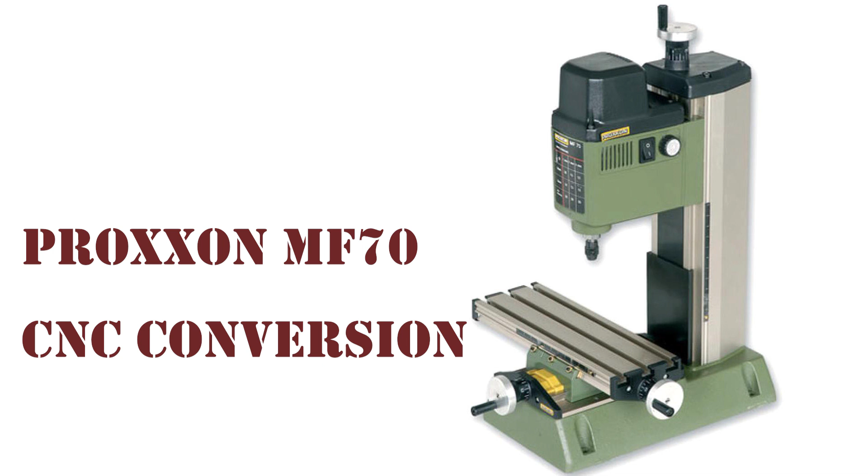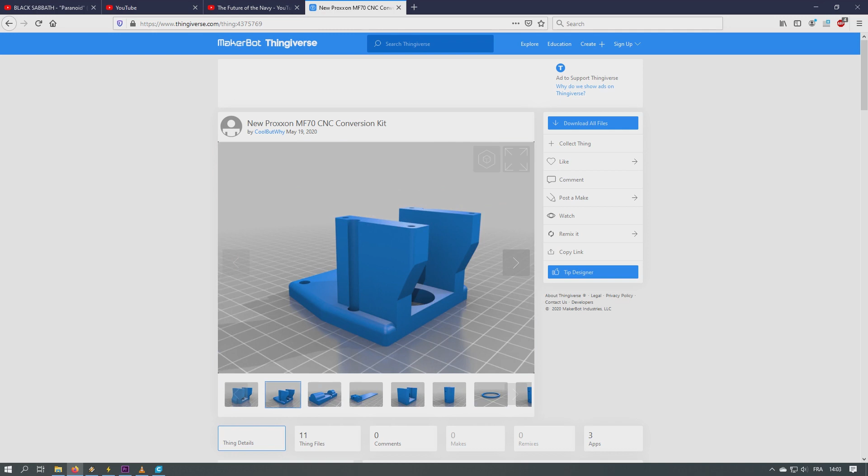Hello everyone, and welcome back to this last video of my Proxxon MF70 CNC conversion. I've managed to put together all the files and publish them on Thingiverse, so I thought I would make this quick video to wrap things up. I will go through the main concepts behind this build and also try to address some of the other aspects of my CNC experience.

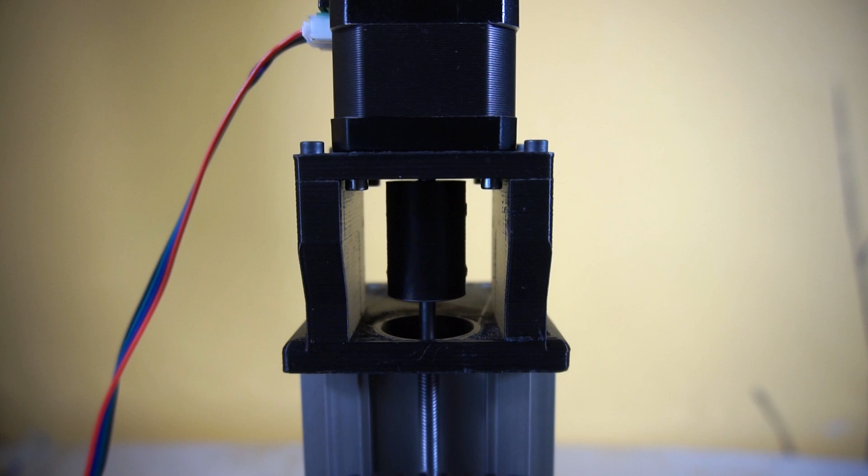The main idea of this conversion was to use the stepper motor as the fixed point of each axis and get rid of any intermediary bearings, flexible couplings, etc.

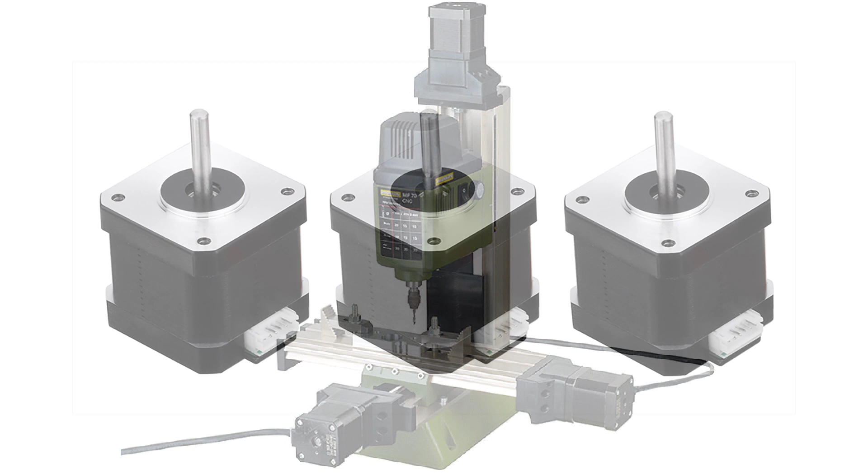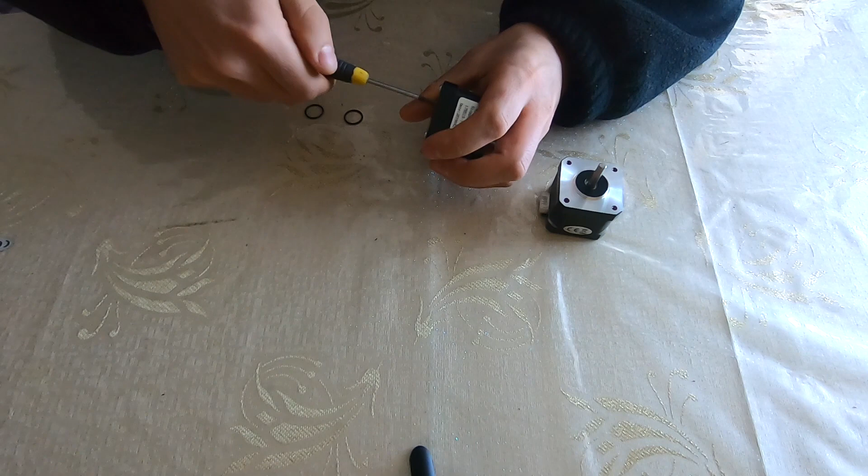Like many CNC conversions out there, this one uses the popular NEMA 17 stepper motor. So we'll start with the motor, which has been the recipient of the first modification, which, although small, is critical to this project. The idea is to take up the slack inside the motor so it can function as the fixed point of the axis without adding to the backlash of the system.

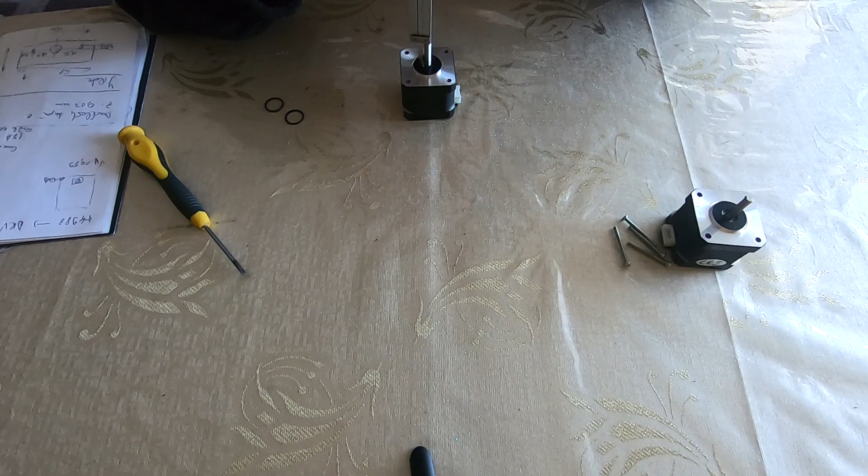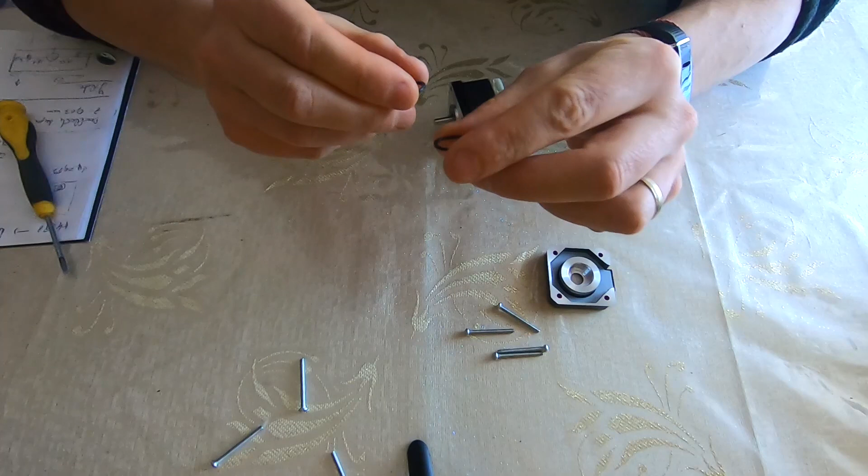You will first have to remove the wave washer inside the motor, measure the play, and print the adjustment ring to the correct height. For this you can use the scaling function in your slicer. In my case, the play was different for each of the three motors, so be careful. Do them one by one, ideally.

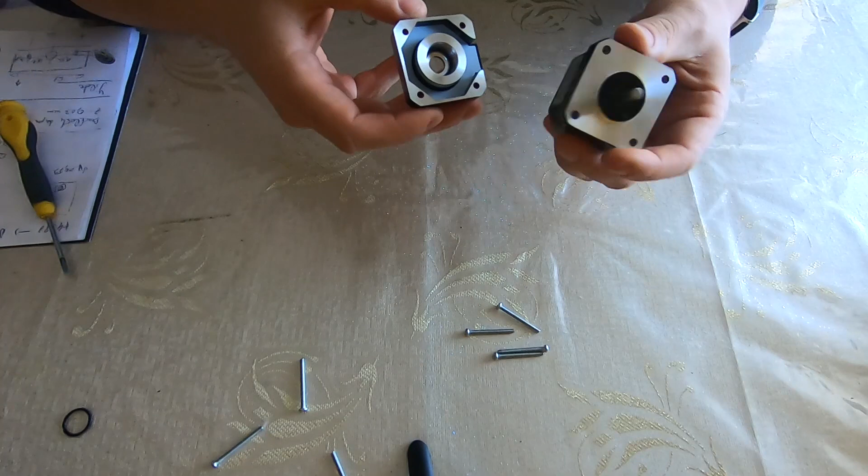The coupling between the motor and the lead screw is made rigidly using this 3D printed coupler.

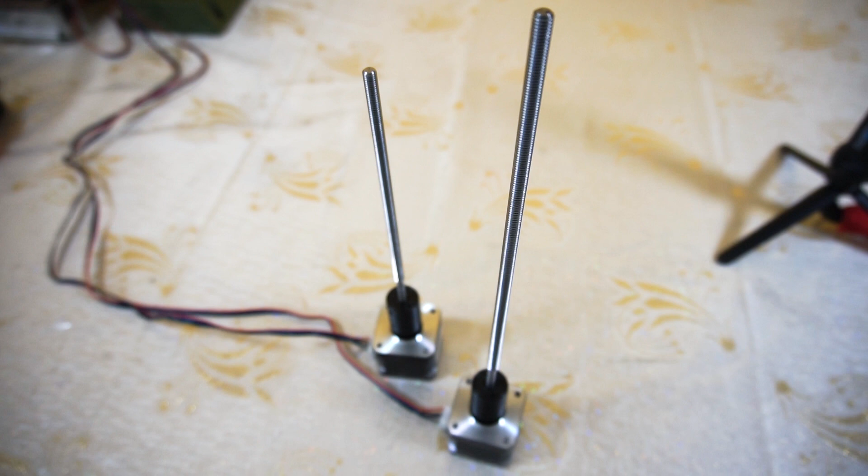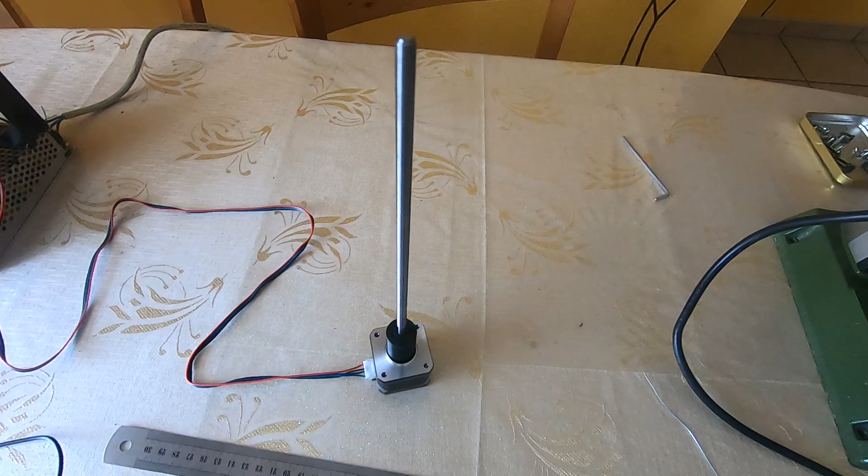The original lead screw is not particularly straight, so you will need to fix the wobble as best as you can. I think a small amount of movement can be tolerated by the system, so don't worry too much about this one.

The bridge part of each axis is just that, a link between the motor and the milling machine.

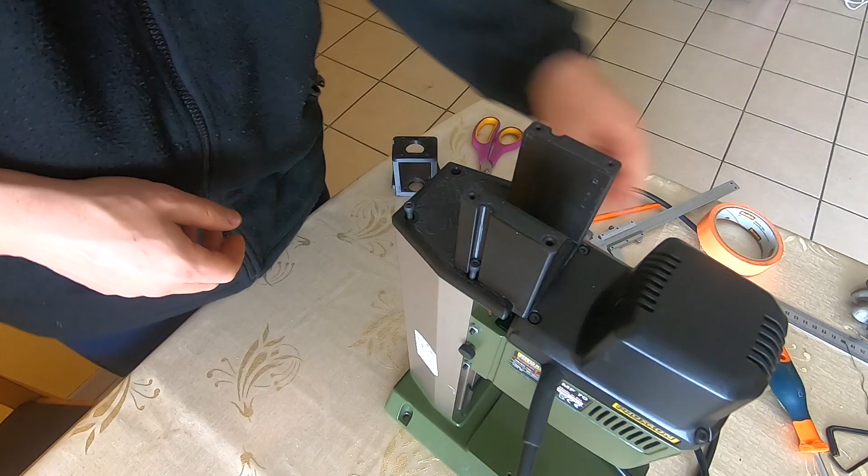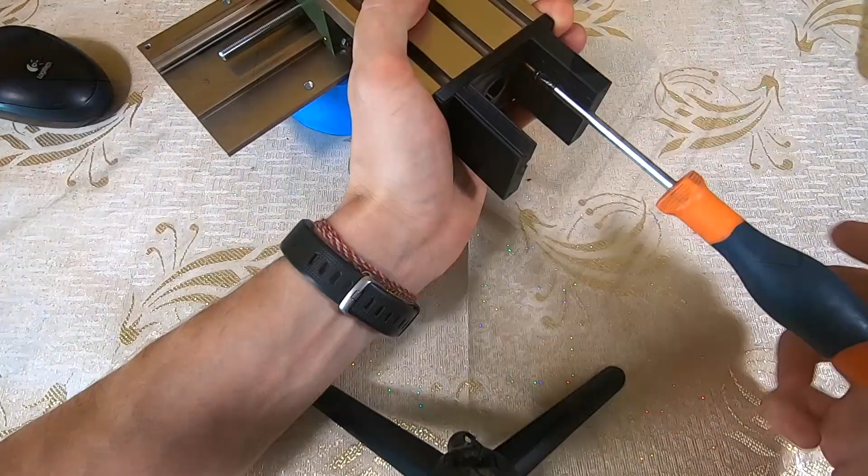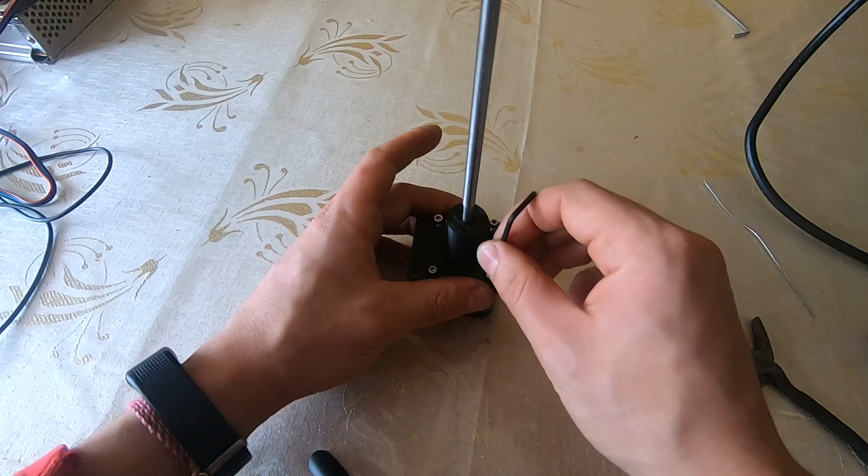The motor is mounted first onto a plate, then to the bridge that you just saw before. This part is the same for all three axes. I used M3 socket screws to assemble this part.

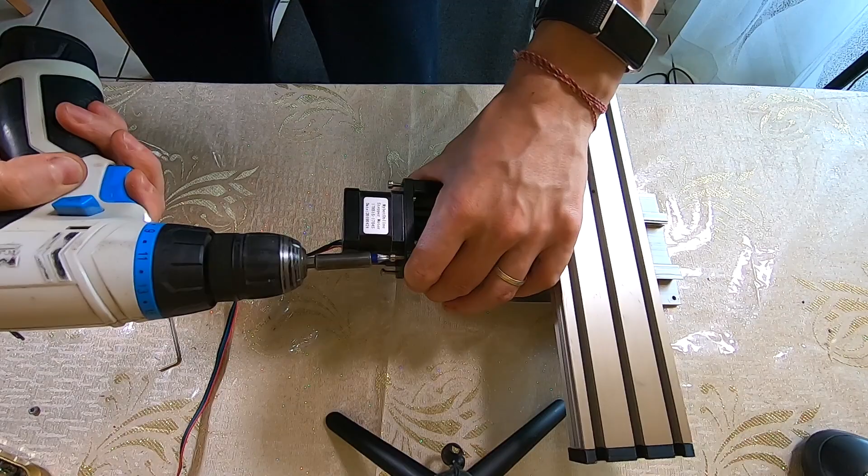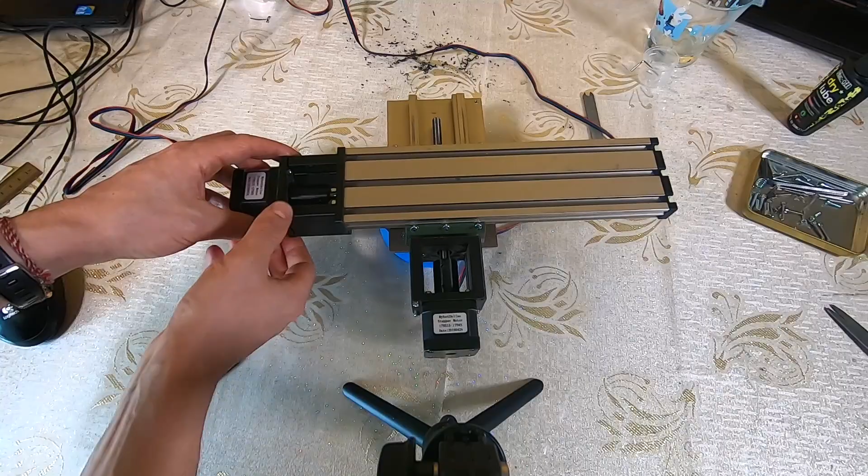I know some purists will say that you shouldn't use machine screws directly into plastic, but it works just fine in this application. If you have trust issues, you can use wood screws, which will definitely hold better. But make sure to use the ones which sit flat and not the conical type.

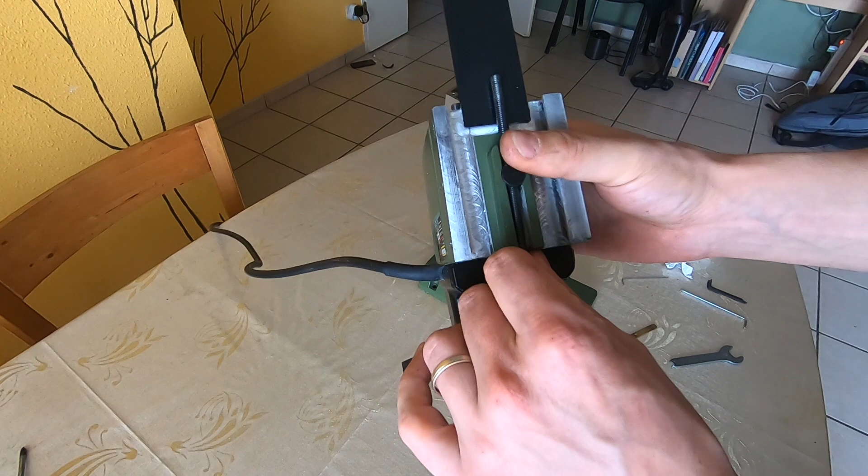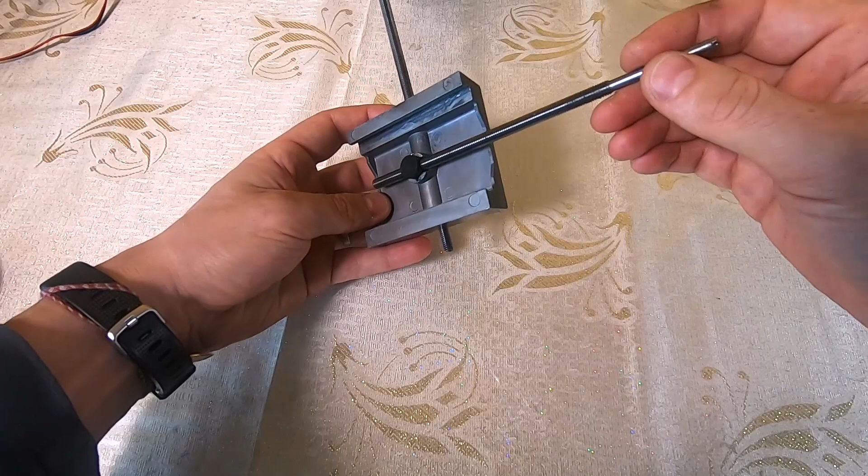Now, at this point, you could stop here and this would make a fully functional conversion. If you want to take it a step further, you can replace the original plastic nuts, which in my opinion are the source of some of the backlash in the original machine, with 3D printed ones.

You will have to tap the passage for the lead screw yourself. The Z and Y axis take left-handed lead screws, so you will have to get this particular tap.

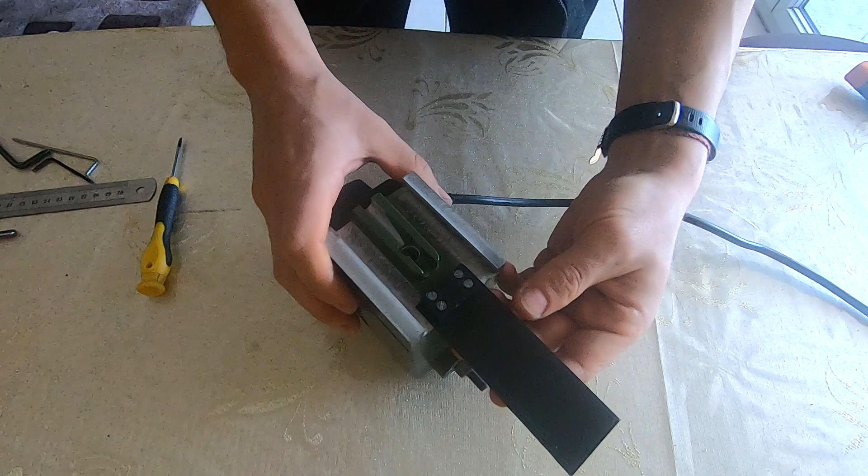For the Z axis, the 3D printed nut screws directly onto the milling head. For the X and Y axis, on the other hand, this requires you to make a cut in your original carriage, which is a bit irreversible.

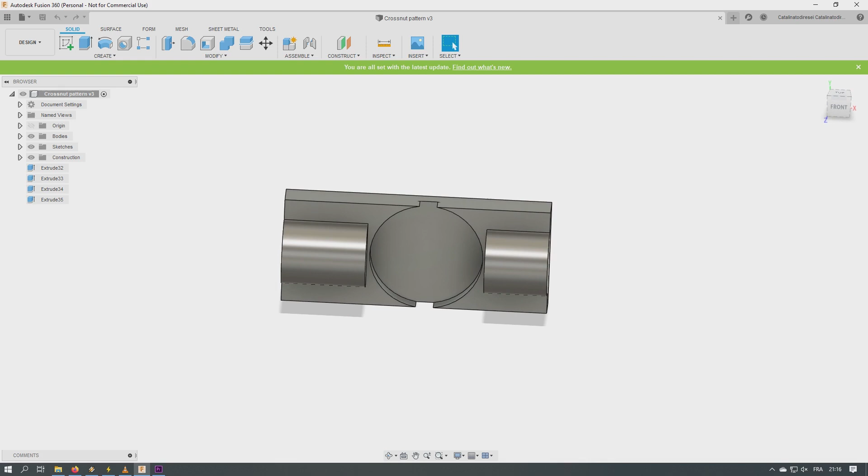Since the last video, I also created a stencil to make this step a bit easier. It goes on top of the carriage and locks onto the seat of the original nut. You can then mark the cuts to be made with a Sharpie.

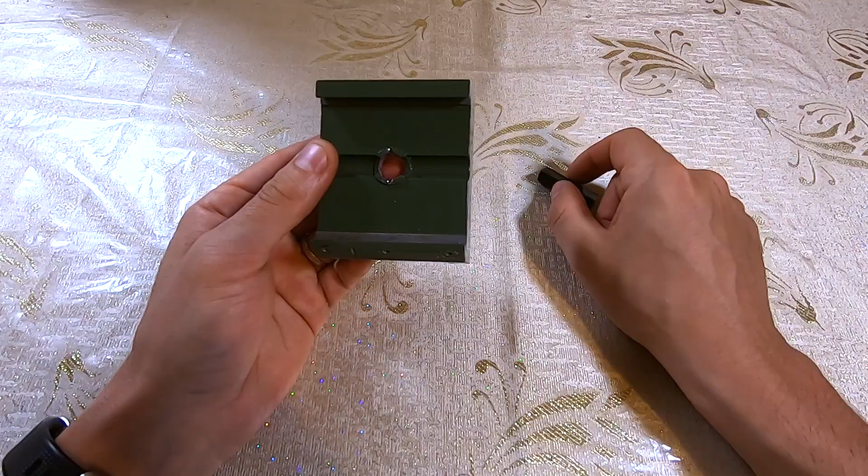In my case, I drilled the holes around the perimeter, then used the Dremel with a cutting disc to finish the process. The X and Y cross nut is available in two sizes, for the original M6 lead screw or for the 8mm

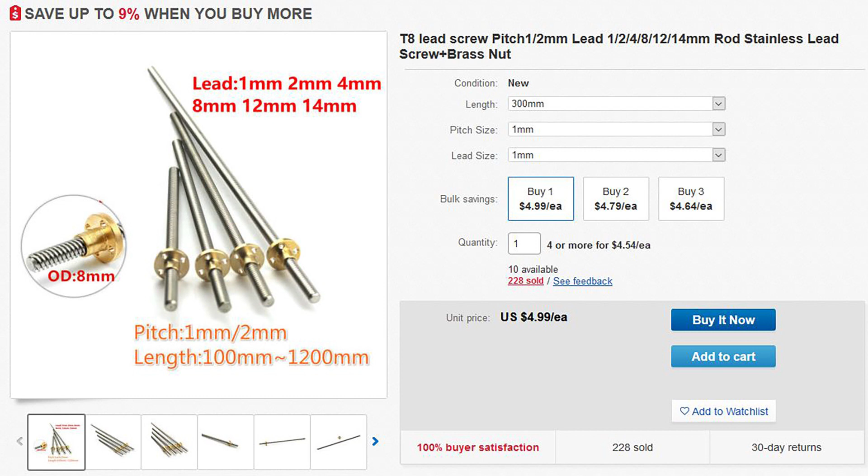trapezoidal screw. I explained the advantages of a trapezoidal thread over the metric one in the second video.

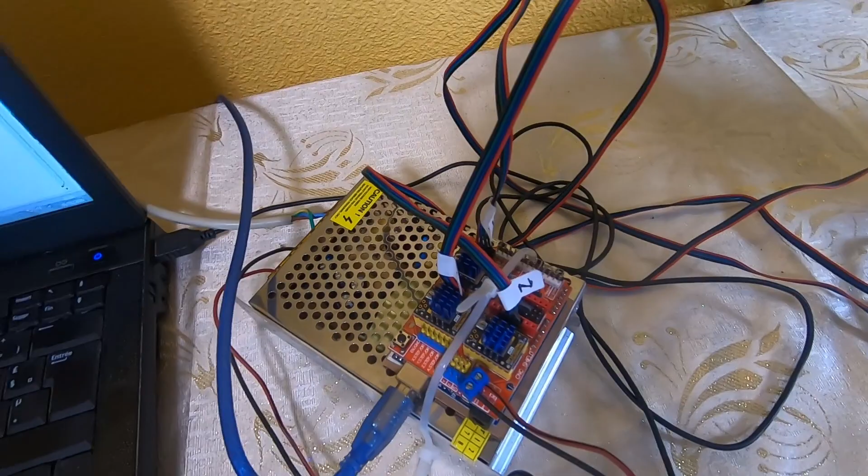What else can I talk about? Electronics. Nothing too special here. I use an Arduino board with GRBL and a CNC shield.

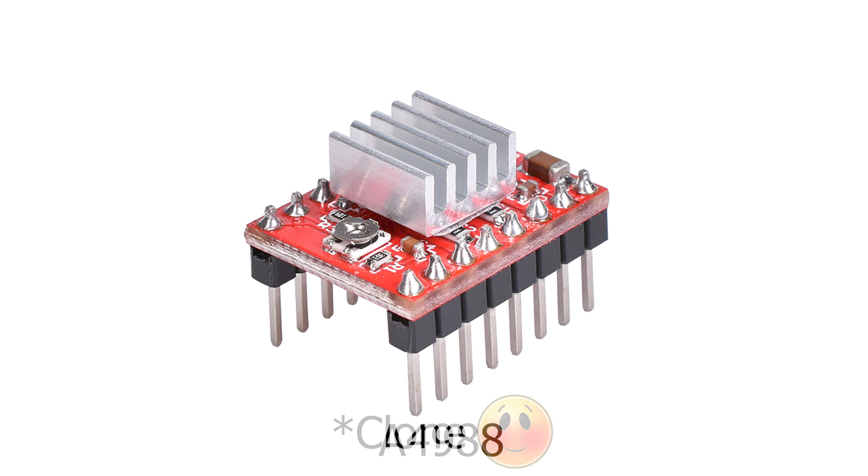For the past 2 years I used the A4988 drivers, but I've since upgraded to the TMC2208, which I run in legacy mode. The new drivers have made a real difference in the way the machine runs.

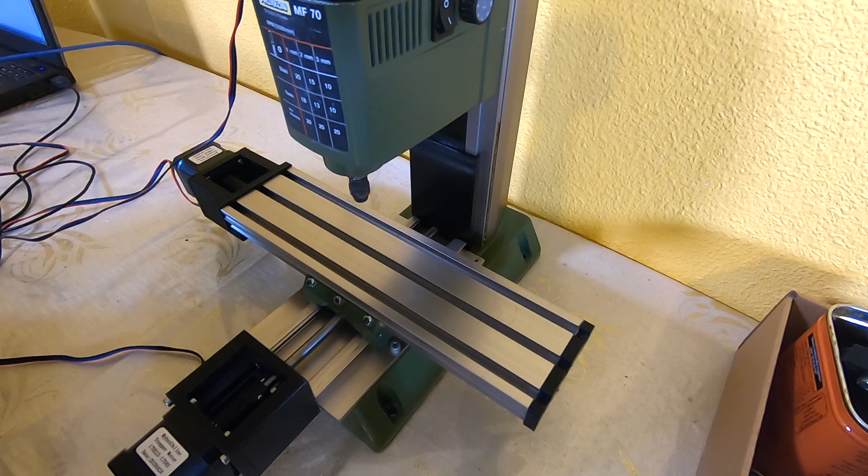Here's how it sounded with the original drivers. And here's how it sounds now.

The currents were set to the same level between the two, and the force it exerts before skipping steps is the same.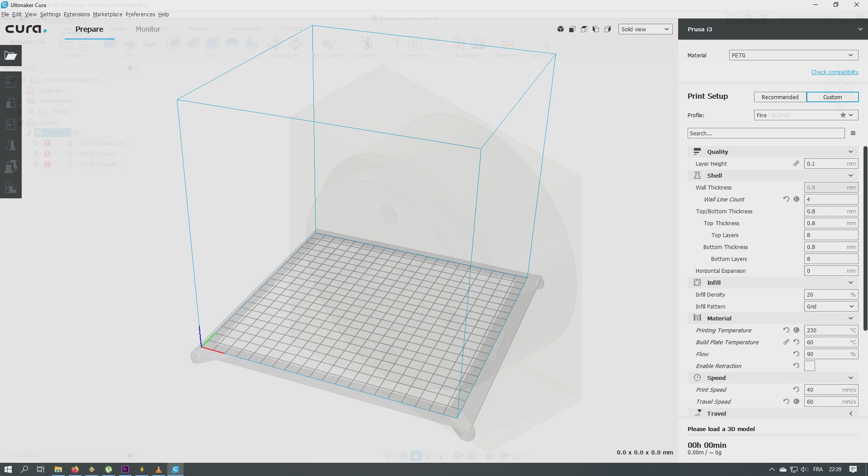What else? I considered making provisions for some end stops, but omitted them in the final design. I never found them to be useful in the time I used this machine. This is not like a 3D printer which has its homing routine and the same origin on the bed every time. For milling operations, the origin of your paths are defined by your stock, so I can't say that I find the homing routine particularly useful.

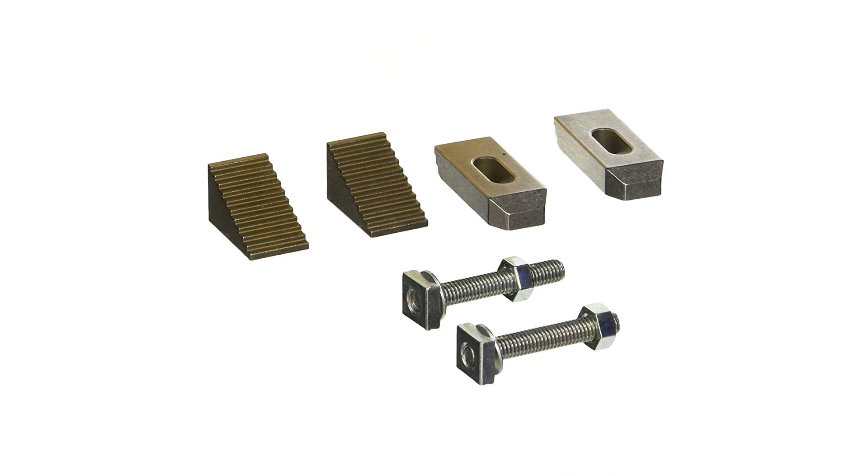Maybe to stop the program in case you run into trouble, but in my experience this has never been the case. When I crashed this machine, it was always either in the stock, if I didn't set the origin properly in CAD, or into fixtures. So end stops wouldn't have made any difference.

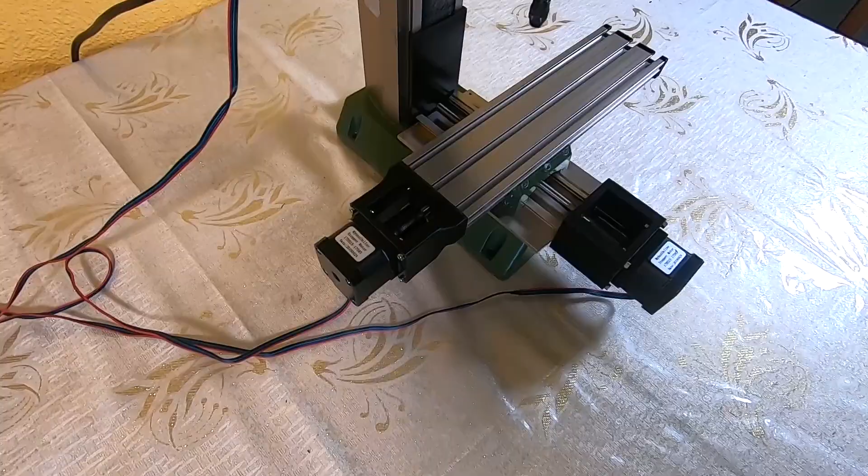Good luck and hope to see you soon for more upgrades to this machine and some actual cutting at some point.